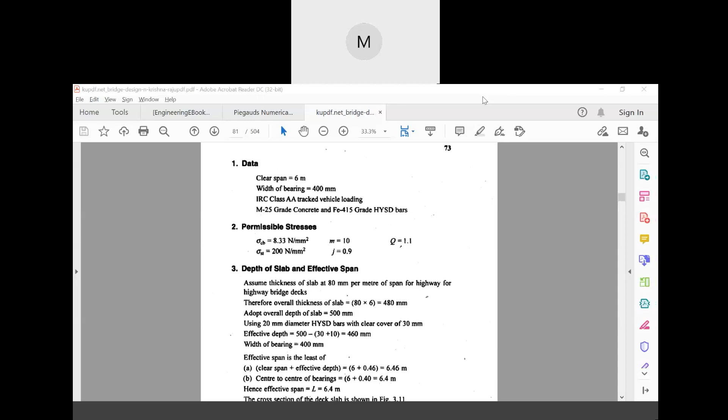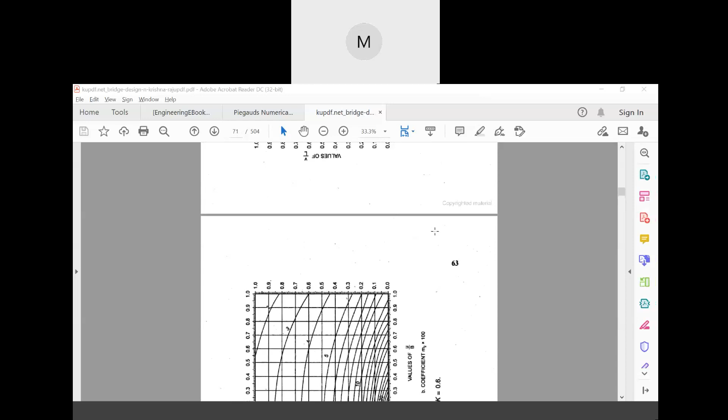You can do one thing. I'm just going to that table. You just take a screenshot of that. This is the table. Now these are the values of M25. So better you remember the values. Mostly M25 numericals are only there. Just take a screenshot and let me know once you're done taking the screenshot.

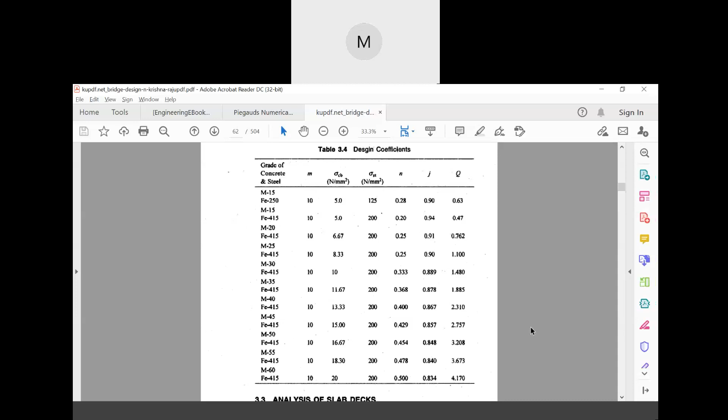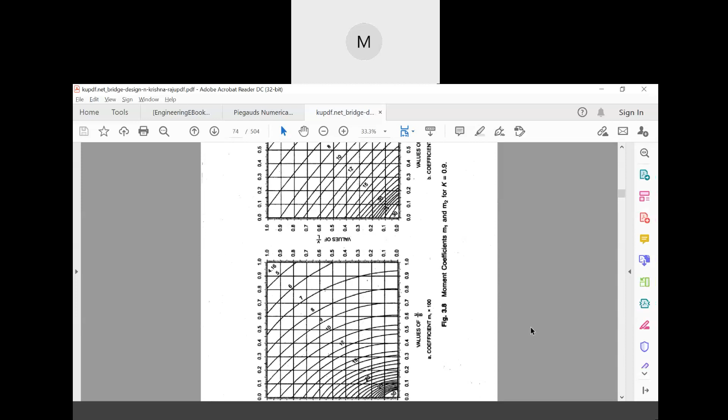Is it done? Done. Okay, fine. So most of you have done it. So let us go to the numerical part. If you see here, from M25 and Fe415, you are getting these values. Now, after that, you will be finding out the depth of slab and effective span.

Now, for these kinds of numericals, there are no codes. So basically, you will have to remember the steps, how to do it and which part comes after which part. So write it like this: number one, data; number two, permissible stresses; number three, depth of slab and effective span. So how will you find out the depth of slab and effective span? Assume thickness of slab at 80 mm per meter span for highway bridge decks.

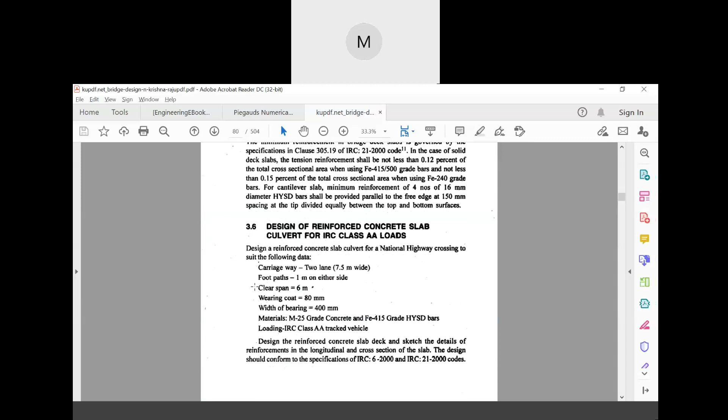Now we'll have to assume it per meter span. For 1 meter, it will be 80 mm. That means for 6 meter span, it will be how much? 480 mm. Why? Because 6 meter is given in the data. The clear span is 6 meter, if you see from the question. So you have assumed it like this. Overall slab depth is 500 mm. This is to be assumed. There are certain values that you always assume. So you have to adopt overall depth of slab equal to 500 mm.

Now after that, using 20 mm diameter HYSD bars with clear cover of 30 mm, effective depth. Now you all remember, I think so, from the DOS class, if it is a beam in design, how will you consider the effective depth?

Okay. Now if this portion is the clear cover, then the effective depth will be how much? From this edge, we'll come down, down, just up to the center of these bars. Just up to the center of these bars, we'll be considering the effective depth.

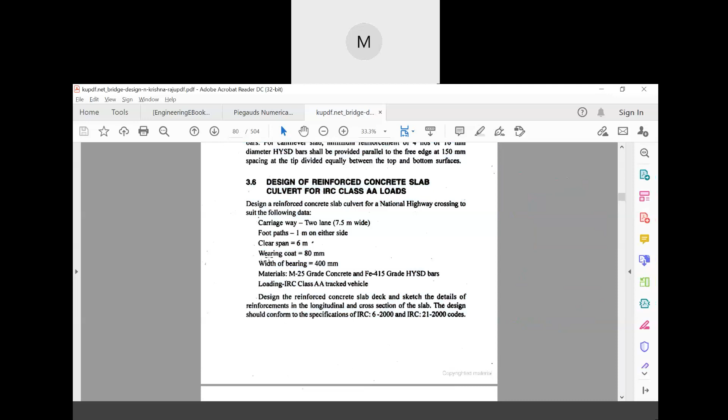Now if you see here the question, it is given that width of bearing is 400 mm. Yes, anyone? Any problem? Any problem? So this width of bearing is given as 400 mm. Now, these all are the important things. The effective span of the

Someone is unmuted. Just mute yourself. Huh?

So now effective span is the least of clear span plus effective depth, or center to center of bearings. Clear span plus effective depth means the clear span is 6 m and the effective depth we found out as 460 mm. Either that one or center to center of bearings. Now how much is the bearing? Bearing is 400 mm, right? And the span is 6000 mm, right?

The bearing is on both sides, right? If the bearing is on both sides, then you'll have to consider half from one bearing and half from the other bearing. That is why it is coming to be 400. Now the bearing is

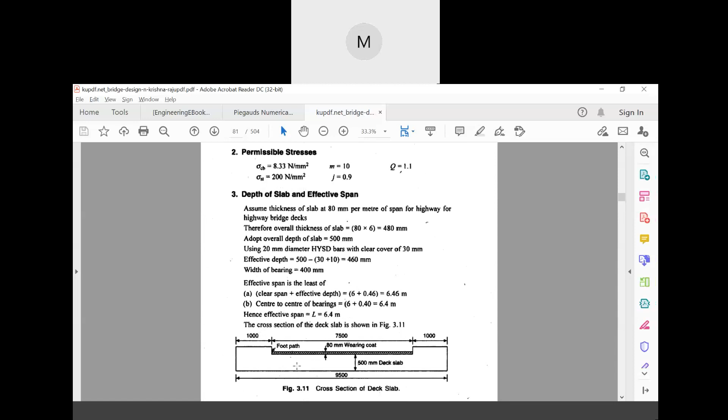Now, we have to find out the design. Now, this is the cross section. This cross section you can draw on the basis of the given data.

If you see, carriageway is 2 lane, 7,500 mm. Footpath is 1 meter on either side. That is why this 7,500 is there, then 1,000 is there on either side. Now the wearing coat is 80 mm, 500 mm deck slab we consider. So in this way it will be there.

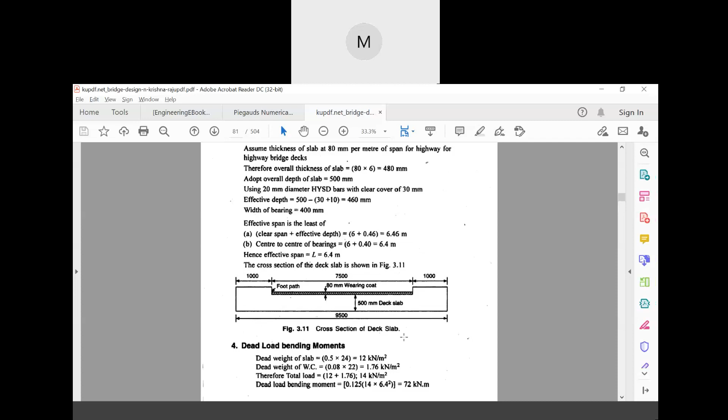Okay. Now just do one thing. I'll give you 3 minutes. Just draw and write the data, everything, and please tell me once you are done. I'm just waiting for you to complete. Please tell me once you are done writing this. Okay, students, please tell me once you are done writing this.

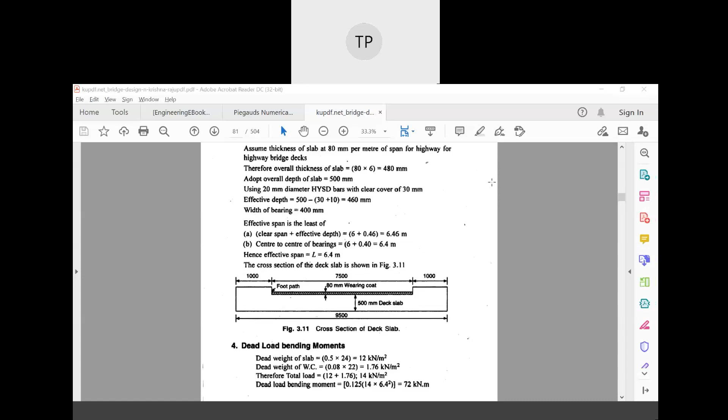Okay, so we are done up to this part. Is it over? Now if you see, we'll have to find out the dead load bending moments. Okay, so how will you find out the dead load bending moments?

Look at this first of all. The dead weight of slab is 0.5 into 24. Now, how come these two come? So first of all, 0.5 means what? 500 mm is the thickness of the deck slab, right? So 500 mm thickness means it will be 0.5 meter. And this 24 is the unit weight of concrete. So that is why 0.5 into 24 gives you 12 kilonewton per meter square.

Now dead weight of wearing coat: 0.08. Why 0.08? Because the thickness of the wearing coat is 0.08 meter. And 22 is the unit weight of the material used for making the wearing coat. Just remember these two. The unit weight of concrete is 24, I guess every one of you knows, and for this wearing coat material it is 22.

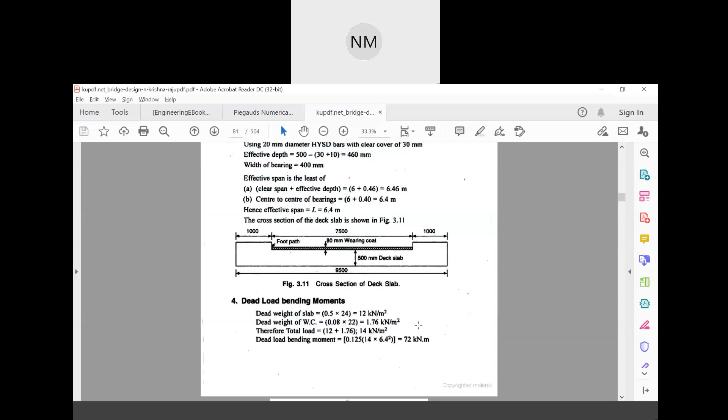Hello, sir. I have a question, sir. About the unit weight: the question says design an RCC slab, but we're using the PCC unit weight. Any reason? Look, Michael, one unit of weight doesn't matter that much. I know for more accurate purposes it will be 25 for RCC. But this calculation is being done using 24. You can do it using 25, I agree with that. But even considering 24, I don't think it will cause much difference.

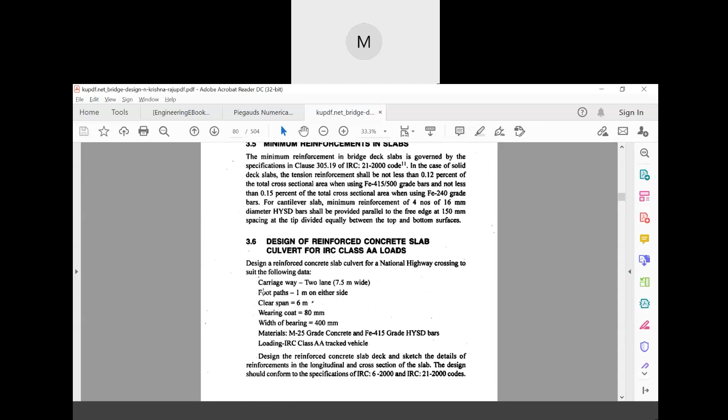Because if you see here, the dead weight will be 25 into 0.5, which is 12.5, right? And here it is 12. So the difference is 0.5 kilonewton per meter square. It doesn't matter much. Is it okay? But in general terms, we generally consider this as 24 only. Even in competitive exams, for RCC and PCC it is different, I know, but in most answers it is 24 for conventional purposes. I hope this is clear.

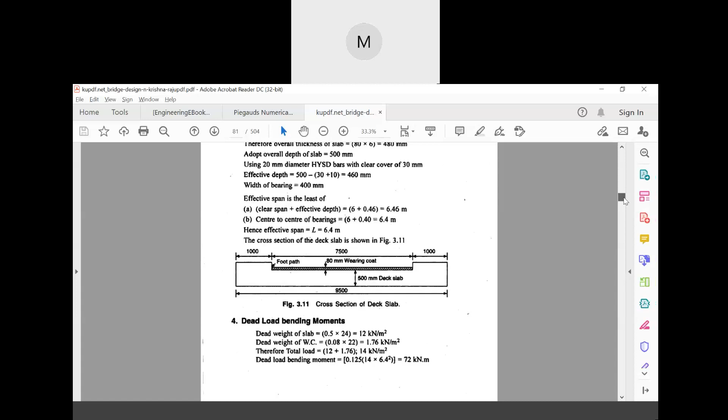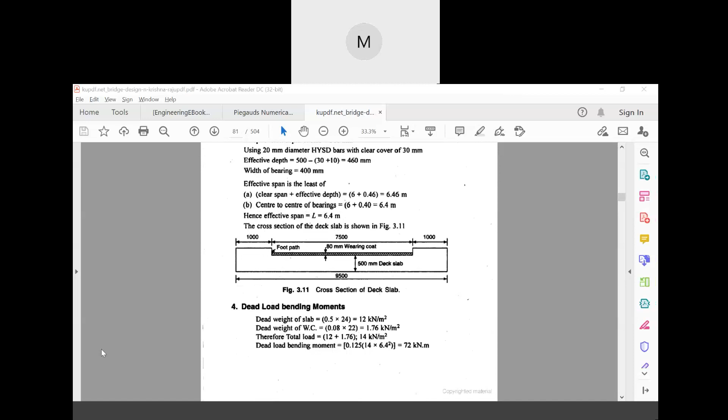Yes, sir. Okay, someone asked me to explain the dead load bending moment again. So if you see here, the dead weight of slab is 0.5 into 24. Just now we discussed, 24 is the unit weight of concrete and 0.5 comes from the 500 mm deck slab, right? The dead weight of slab, I think, is clear.

After that, the dead weight of wearing coat: this is the unit weight, and this is the thickness of the wearing coat, because here it is 80 mm. The first one was 500 mm, and this was 80 mm. Therefore, the total load will be this plus this. Are you getting me up to this point? Please answer.

Then, if you come to the next step, it is what? Dead load bending moment. This will be a UDL, right? Kilonewton per meter square. And we all know the bending moment expression for a UDL is WL square by 8. That is why we are finding it in this manner. Okay? This is how it has been done. I hope this is clear for everyone. Now we'll go to the next part.

Once we are done with dead load bending moment, now we'll go to the live load bending moment. Generally, the bending moment due to live load will be maximum for IRC class AA tracked vehicle loading. Now, remember the impact factor for IRC class AA tracked vehicle is 25% for 5 meter span, decreasing linearly to 10% for 9 meter span.

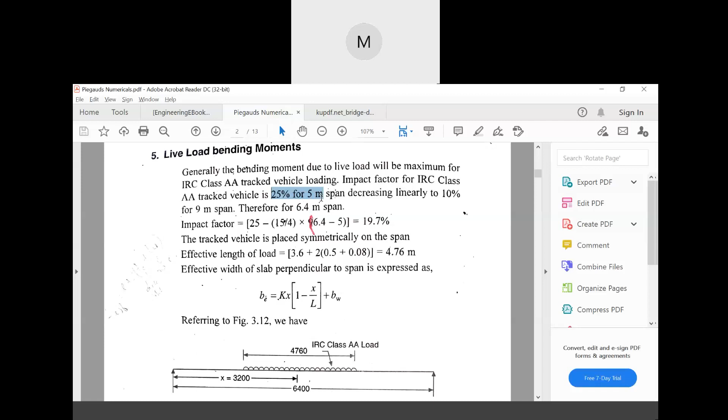Now, we all know here the span is 6.4 meter. For 5 meter span, it is 25%. Now look, if you consider 6.4 meter span, remember one thing. There are two values. For 5 meter span, it is 25%. For 9 meter span, it is 10%. Now, we have to find out for 6.4 meter span. This is basically the interpolation thing.

So how is it done? Look, let me write it here. For 5 meter, it is 25%. For 6.4 meter, we don't know. And for 9 meter, it is 10%. Now, how to find out this one for 6.4 meter? This impact factor has to be found out by interpolation. Okay. So how did you find out?

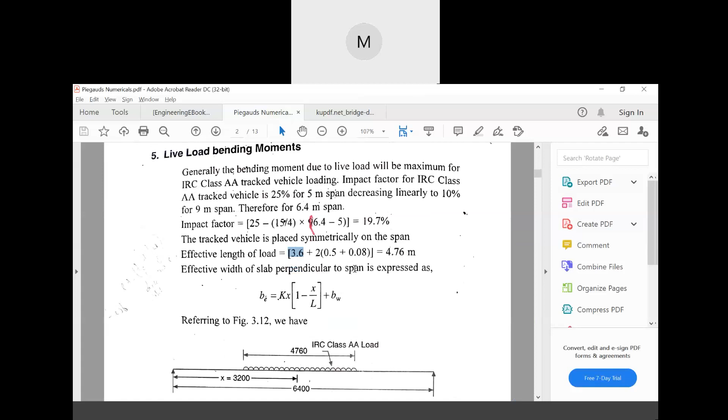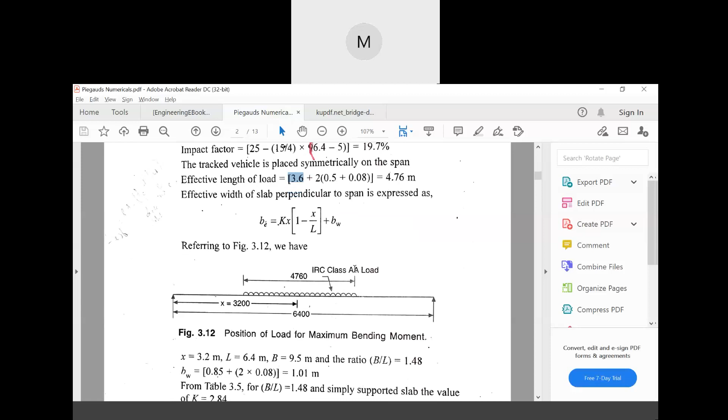Now this 3.6, how did it come? Anyone? I'll give you 1 minute, or else I'll show it to you. This 3.6 came from the IRC class AA tracked vehicle. If you see the diagram, the length of the track is 3.6, that is 3600 mm, in the very first figure that you drew in class. Okay, so this is how you'll be finding out.

Now, after that, I hope this is clear up to this part. Effective length of the load. This effective length thing is clear, I think, for every one of you.